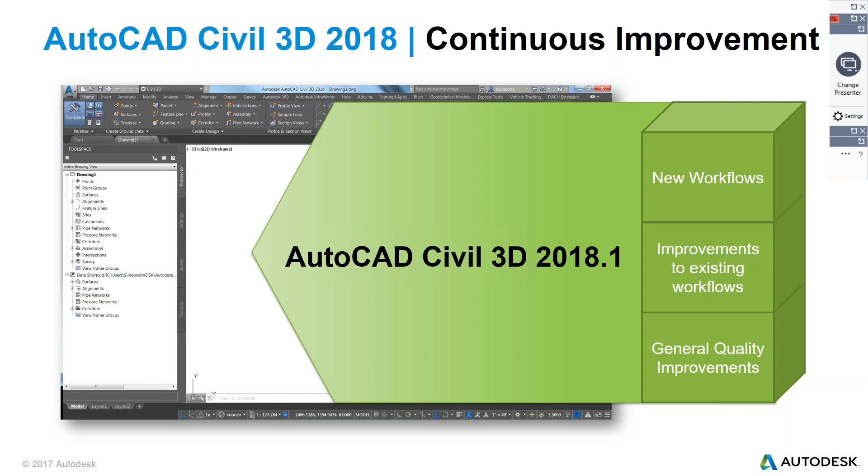In some cases they're adding new workflows, in other cases modifying existing ones. So the goal is really part of that whole continuous improvement strategy—basically to give you benefits, give you things that make you more efficient, but do it in a way that's as least disruptive as possible.

As we looked at this update, we started the process by looking at the different users and the problems we want to first understand and then provide a solution for. It's basically a simple pattern: I, as a specific type of user, need something. I, as a transportation engineer, need some ability. I, as a drafter, need a solution for. I, as a CAD manager—those are our primary personas that we're targeting solutions for. They all fit into, in this case, a Civil 3D customer. So I, as a Civil 3D customer, need a solution for these types of problems.

One of them is: I need an easy way for my design team to model and optimize roadway rehab proposals. I, as a Civil 3D customer, need a more flexible solution for creating pressure and gravity network content. I need to reduce the time it takes to create and edit section sheets. When we get into the blue, these are more about modifying existing workflows, whereas the green are more about new workflows we've introduced.

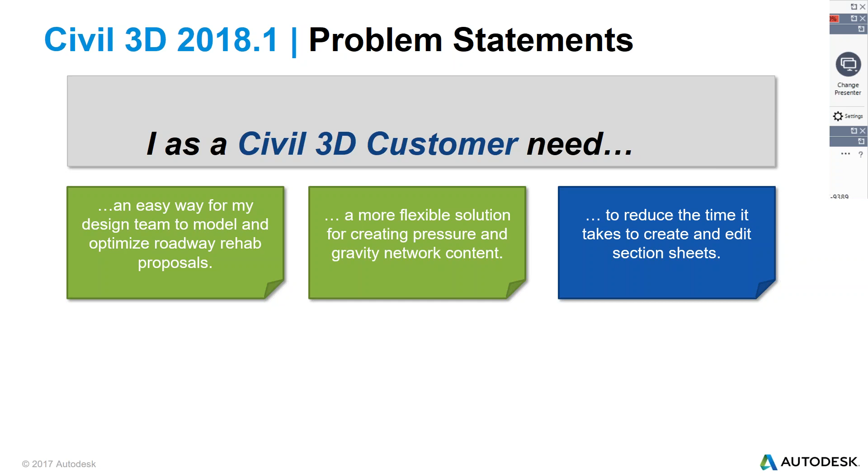Continuing on: I, as a Civil 3D customer or organization or CAD manager, need my CAD manager and production users to maintain design and production standards.

I need a roundabout modeling solution that meets design requirements and delivers a high quality model. I need the ability to share alignment and profile geometry with others.

These are the big theme areas or focus areas of Update 1. There are other smaller things, but we won't get into general maintenance, defects resolved, or similar changes in this presentation. Those will be clearly documented at launch time, so in the README you'll have a list of all those types of changes.

Okay, so let's start to drill into these. Let's just jump right into them.

The first one, I'm going to pass this over to Tim, is probably the primary theme of the release. This is tricky from a marketing standpoint because we typically want to call out one primary focus area, and this really is, I think, the biggest change within the product.

It's something driven by demand from our owner-operator clients, but it also greatly impacts our commercial accounts, our consultants who work on any type of transportation project. So what I want to do is pass it over to Tim to walk through what we've done here.

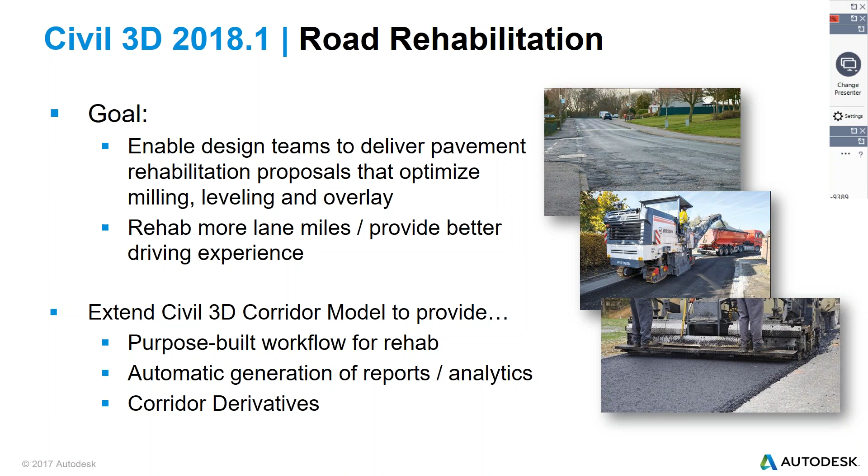We also made sure that any work we did around road rehab got you the same kind of derivatives afterward—anything needed in the way of extracting solids, feature lines, and that sort of thing from the rehab corridor model. So that was the goal there.

This also ties in very nicely not only to what we have in the Civil 3D corridor model today, but also into some of the workflows we've been working on the InfraWorks side.

In 2018.1 for InfraWorks, we did a lot of work making it easier to extract linear strings from point clouds. Based on those strings, we're able to bring them into Civil 3D and create a really good model of the existing ground surface, which gives us great data to leverage in this road rehab process in Civil 3D.

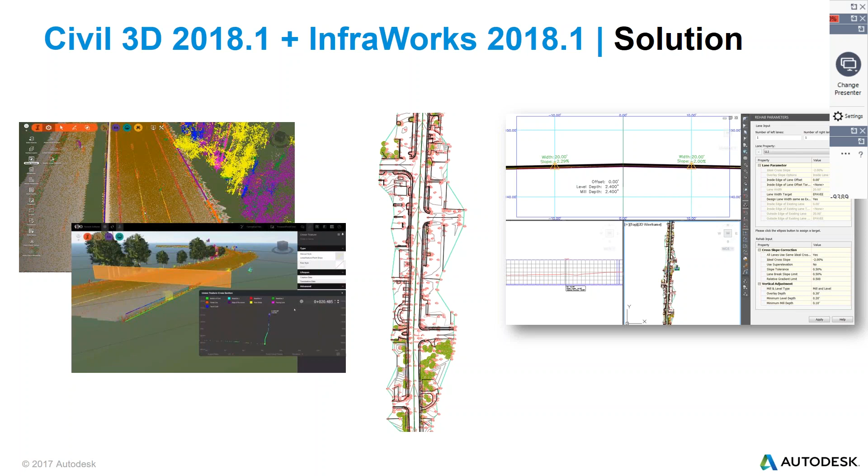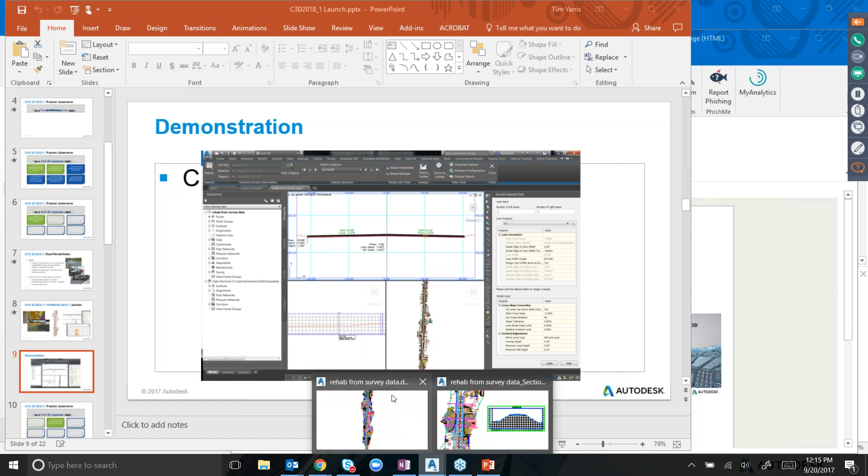So with that, I'm going to jump into Civil 3D and give you a quick overview of how this works.

The model I have on screen right now is an existing site, not created from the point cloud data I was just describing, but an existing ground surface created from a number of survey figures and COGO points grabbed from the real world. So basically what we have here, there's no corridor model, and no assembly or anything like that.

So basically what I'm going to do here is go through a process that's just kind of rehabbing a portion of this particular road. As Dave mentioned, in the .1 update, we did a really nice job integrating some of these new tools into the existing Civil 3D interface.

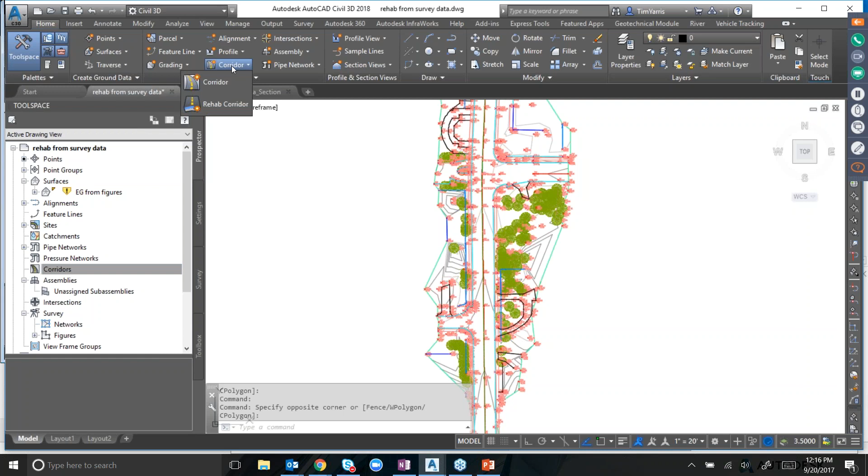In the past, when we did things like productivity packs, we'd have a toolbox with a bunch of nodes for the new tools. But for this case, we were able to add some new tools directly into the existing ribbon. So I'm going to launch this new rehab corridor creation process just from the ribbon, like you would for a regular corridor.

It's a very familiar situation to what you have with a lot of the other Civil 3D objects. We have just a creation dialog where I'm going to name my corridor, rehab corridor. Same kind of thing with styles, alignments, and profiles, all that good stuff. For this case, I don't need to have an assembly defined out of the box.

I just need to know my alignment - I'm using an existing ground profile for this case - my target surface, and then what I'm going to do is restrict this region. I'll start my region around here, and end this particular region around here. After you've done this, you can add corridor regions for different rehab areas as well. I'm just going to target my existing surface.

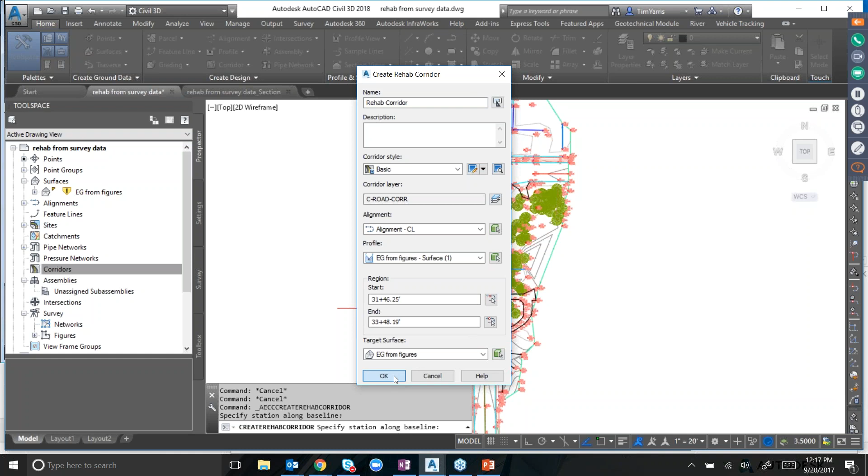Once I click OK, a couple things are going on here. You'll see on screen a similar kind of situation as we have with the existing corridor editor, like the section editor in Civil 3D. We have a newer version of that purpose-built for the road rehab process, and also this newer interface docked on the right-hand side of the screen.

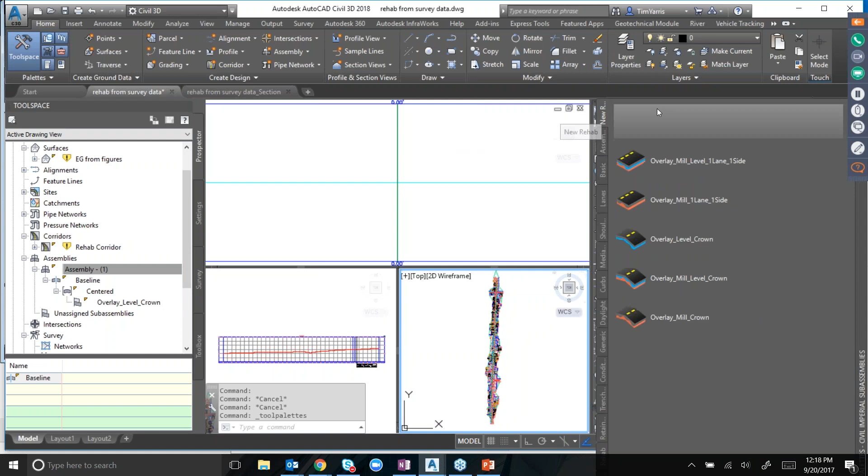This is just letting you enter rehab parameters. As I get into it, it automatically created a corridor model that's, for all intents and purposes, empty right now. We also have an assembly that was created, just a dummy assembly based on these new rehab subassemblies we're shipping with the product. Different subassemblies are applied automatically as needed for different purposes.

So for this case, you'll see I have a left lane and a right lane. I can do things all along this. What I'm going to do is specify what your cross slopes are and all that good stuff - targets, all that sort of thing.

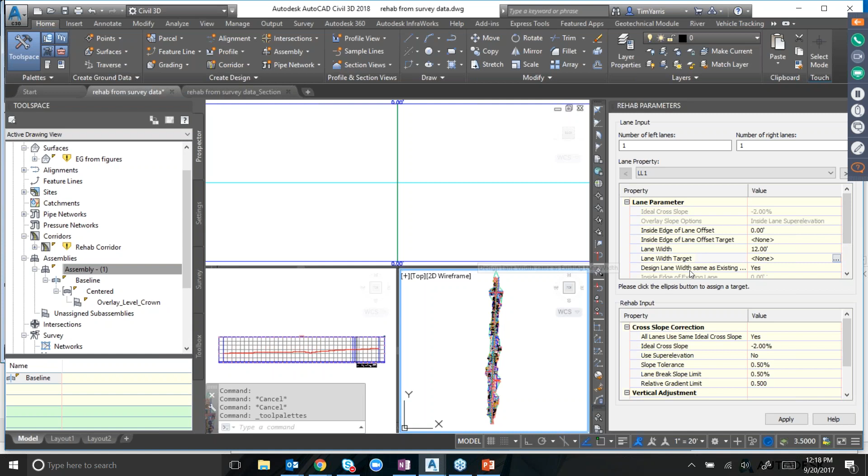Like I said, I have a whole bunch of feature lines, or survey figures rather, that I created in this model. For my left lane, I'm going to set one of those as a target. I'm on my left lane, and I know this is on my right side of the corridor, so I'm going to pick that one.

Yeah, the change is going from the top of the screen to the bottom. Yeah, it looks like he's picking the other side. But yeah, really - trust me, I know what I'm doing.

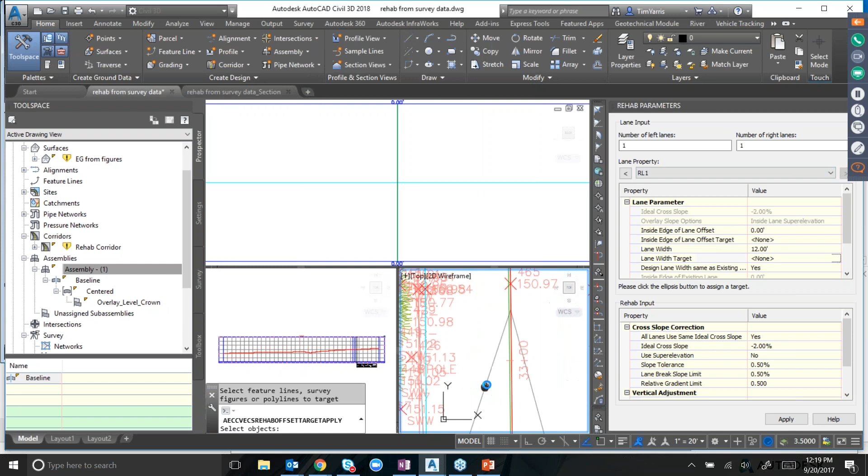I'm going to do the opposite on the opposite side - same kind of thing, so I'll pick that one. I'll zoom out a bit just to get my bearing straight again, and I'll click OK.

And then same kind of deal down, like anything I do at this particular dialog, this is going to affect both lanes for the entire corridor. So what I'm going to do next here, this bottom portion kind of lets you specify more of what actually is going to happen as you're rehabbing the corridor.

You can set things like your ideal cross slope, whether you want to apply super elevation that you have applied to your alignment. You can specify what your process is going to be, whether you want to level it, mill it, or do both. For this demo, I'm just going to go with milling only, and I'm going to set a minimum mill depth of 1/10 of a foot.

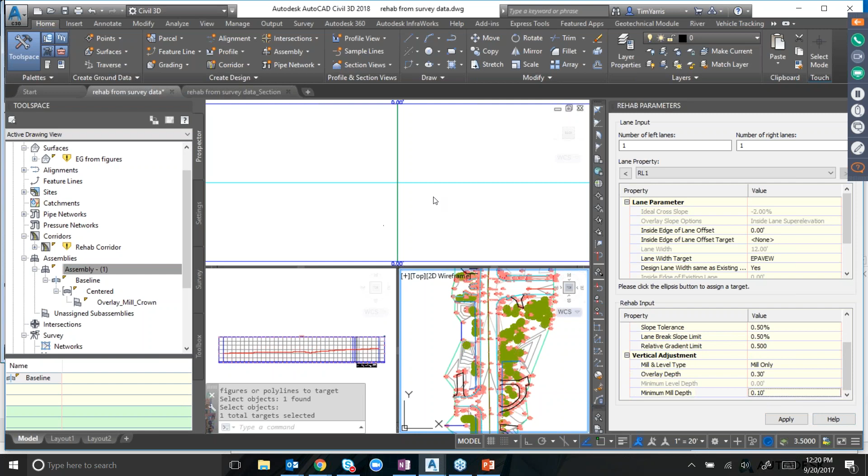So as you see here, there's nothing going on at this cross-section view at the time. But now that I'm going to click apply, it's going to actually build that subassembly, or that assembly, for me, and it's going to apply it throughout this region.

And now it gives me a really nice view into what exactly is happening with my rehab corridor. So if I go in and zoom in, you'll see a couple things going on here. I've got a style set up here showing... keep losing my mouse here for some reason. But anyway, what's happening is that I've got this—

hatched version. Okay, so the pink layer here is showing the milling depth and all that kind of thing, and then the hatch is showing what my overlay is. Oh, leveling. Leveling. Thank you, Dave.

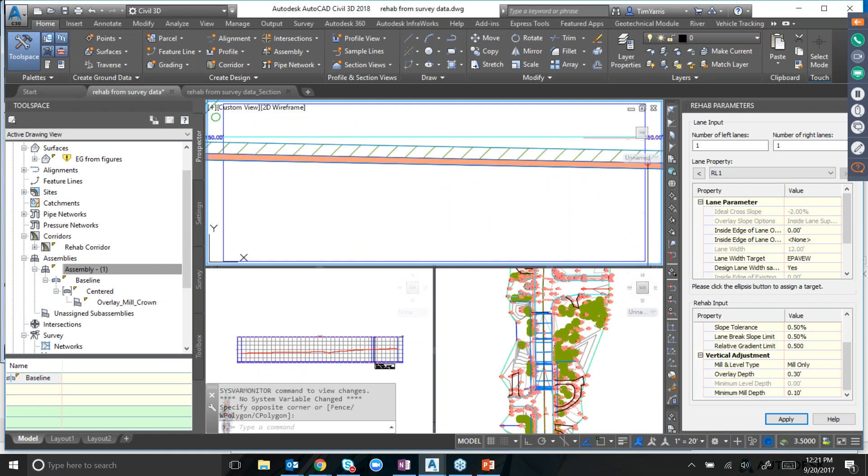Yep, there you go. So basically what's going on here is that it's building out this corridor, specifying a whole bunch of really critical points, and we have those critical points labeled as to what's specifically going on at each of these points. So I've got my mill depth labeled really clearly here. Sorry about those big funky markers, those weren't what I was expecting here.

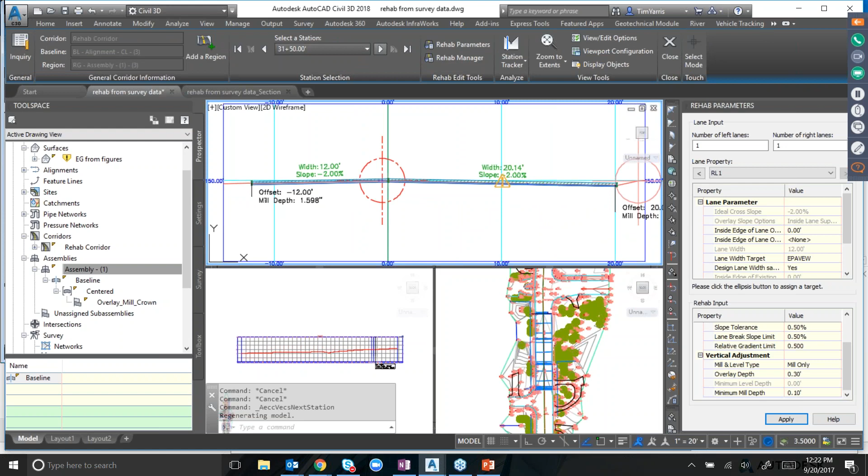But anyway, so basically what's going on is that I've got this corridor rehab ribbon here that now I can go ahead and step through section by section what exactly happened with my rehab corridor.

And as you'll see here, both in my plan view and also my profile view, we have the tracking markers set up there, so that as you're stepping through all the different stations, you're seeing in all contexts what's going on, and you're seeing in the profile what my adjusted elevations are for my cross slope correction and all that kind of thing.

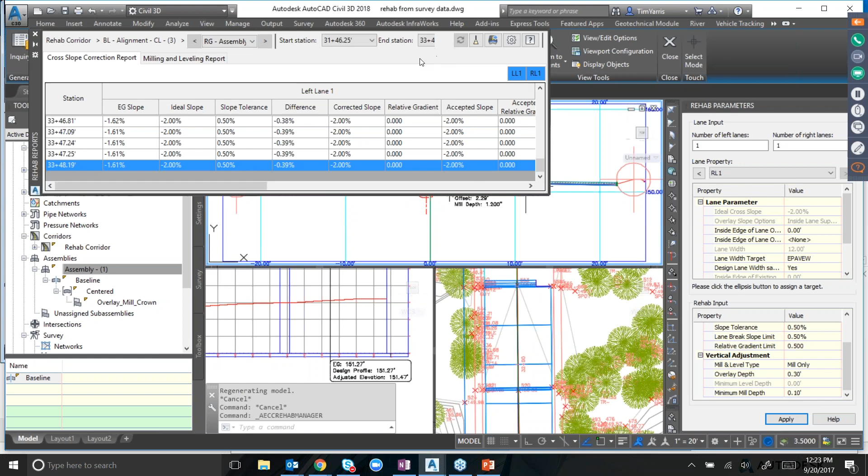So basically, once I've got all that great information going on here, you'll see that I have some warning glyphs showing when some of those parameters that I set in the right-hand panel have been violated. I've got some tooltips showing me exactly what's going on, and I can actually go into this Rehab Manager tool. This is this new tool that we have here, and it's going to give me a lot of information about what is specifically going on at each of these stations.

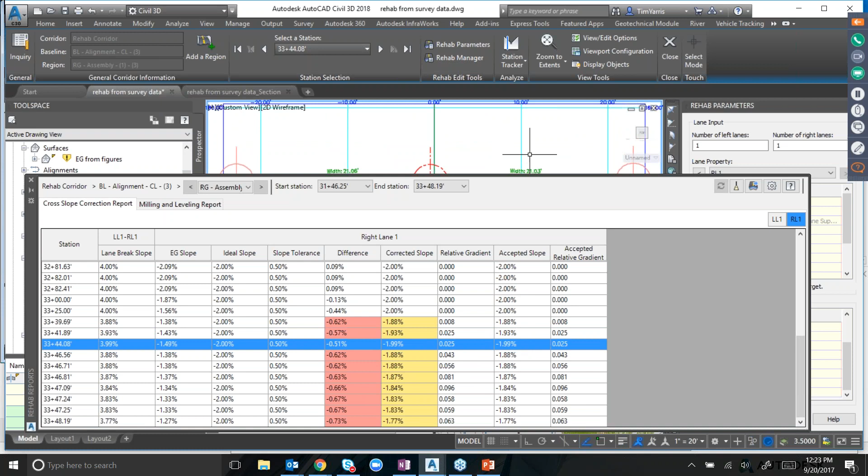And so I know for a fact that I don't have anything that's necessarily violating anything on the left lane, so I'm going to hide my left lane parameters in here. And so basically what I could do in here is make any kind of minor modifications to my rehab corridor at each individual station.

So for example, right now I have my slope at negative 1.99, if I wanted to bump that, if I want to just round that off really nicely to a solid 2, I can do that. And as you'll see here, that automatically changes in my section view as well. So I can just keep doing that and make any kind of really minor tweaks as I go along and as I want to modify my design.

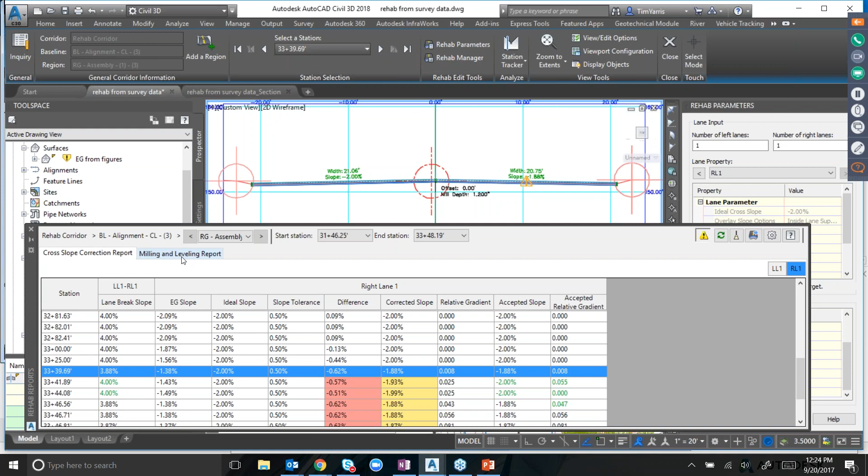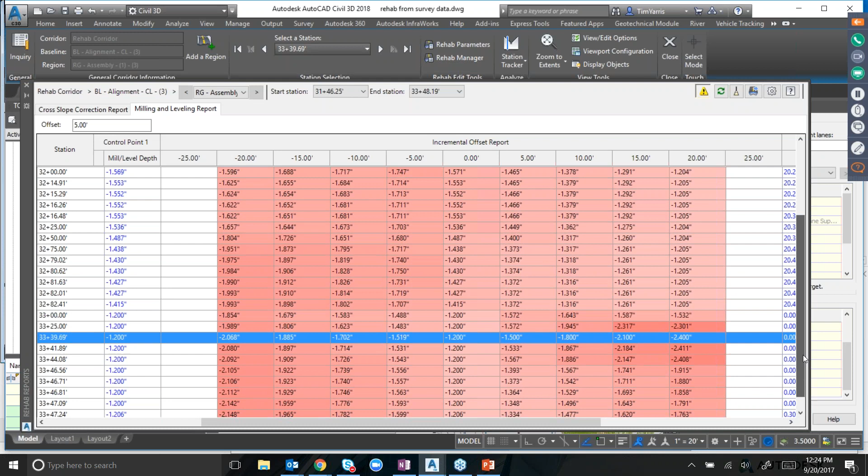As users get further into the process, we have this milling and leveling report tool on the rehab parameters panel. That gives you a great overview of what's going on across the entire rehab corridor region you're working with. We have a heat map showing specific areas where the really critical milling or fill and leveling areas are taking place, giving you a great overview. Then you have tools up here to export the report to a CSV and take it over to your pavement manager for further analysis in Excel or something like that.

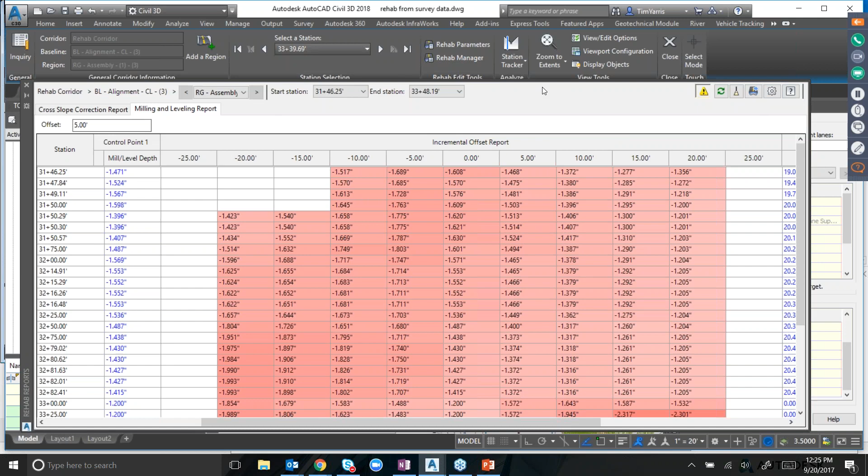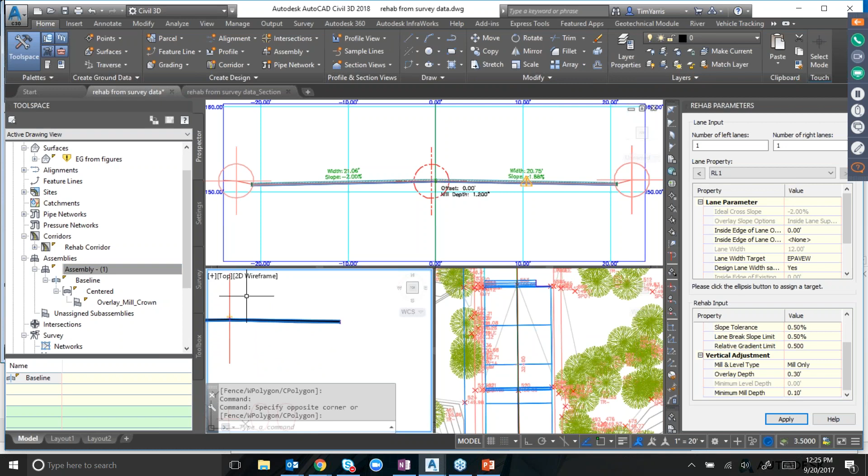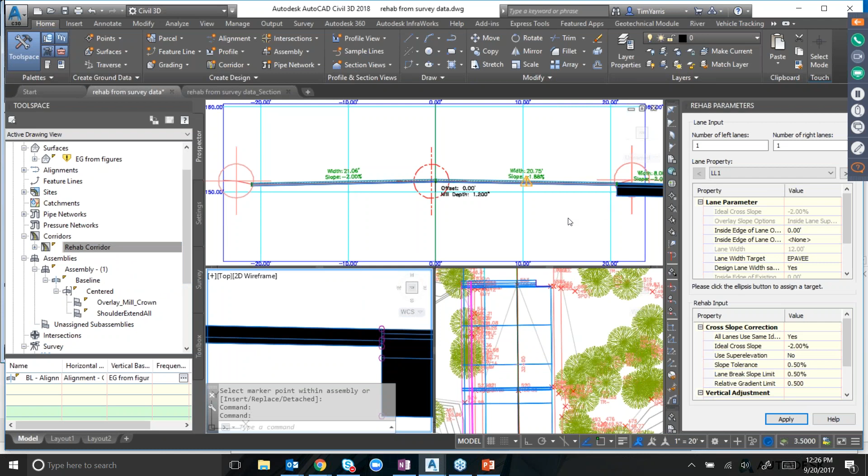Going back to the whole idea that this is just a corridor model, as Dave and I said before. So if you were doing something like a widening, where this assembly's been built for you automatically, what if you want to add a shoulder subassembly onto this assembly that's been built for you? I can do that, rebuild my corridor, and that's automatically tacked onto the rehab corridor that's been built for me.

And again, I can go get the same information out of the rehab corridor model that I can get out of my existing Civil 3D corridor. I can extract my solids from it, drive along it, and do any downstream processes that I can do with any of the other corridors I have today.

There's a ton more we could get into with this, but I'm going to keep trucking through some of the other stuff in the interest of time.

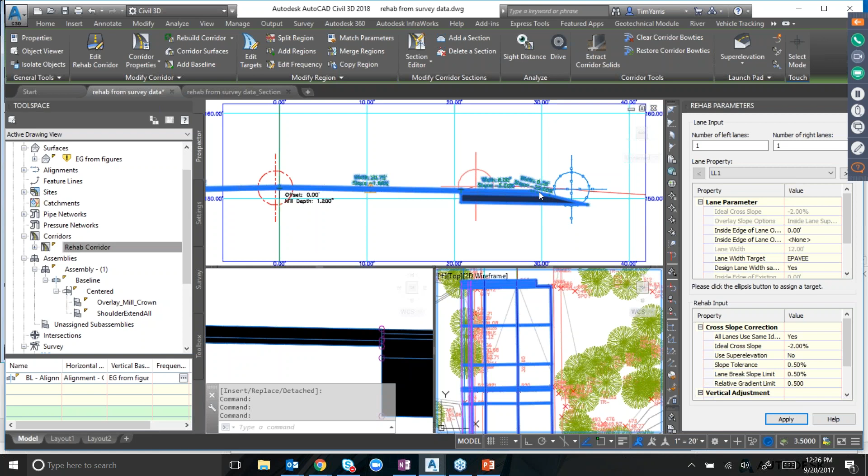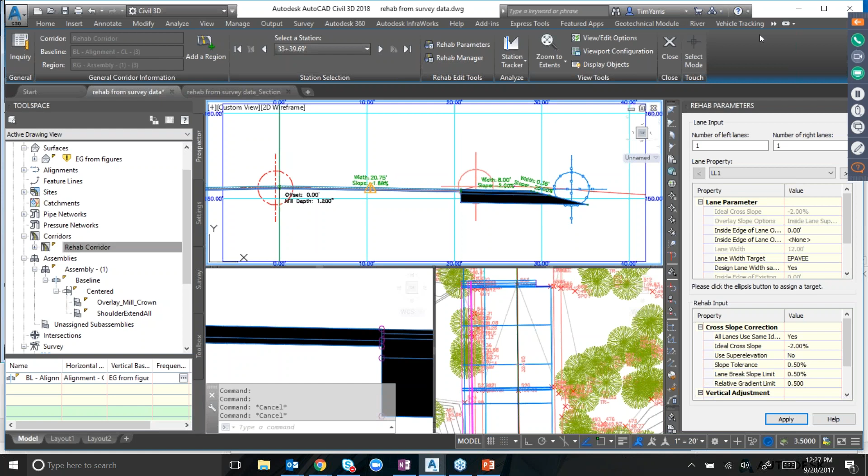I think the key point to get across to everybody is, one, this is just a Civil 3D corridor. It's a corridor that knows it's got a specific type, a rehab corridor, but it's still a corridor. So as Tim showed, you can modify that corridor using traditional corridor editing or interaction. Also, all of your corridor output and derivative utilities or options are available, so you can extract strings, build surfaces, make solids, or do any of those other things, including production drafting. That's a key thing because it greatly expands the value of this.

The other thing that's been really interesting for us is this idea of taking the corridor as a starting point and building a purpose-built workflow around it. We see that as something that could be beneficial in other areas. We're investigating whether there are other very particular types of corridors that would be much easier for people to compose or interact with if we built some type of interface like this. I wouldn't be surprised if over time you start to see more of this approach of extending the corridor into something more targeted.

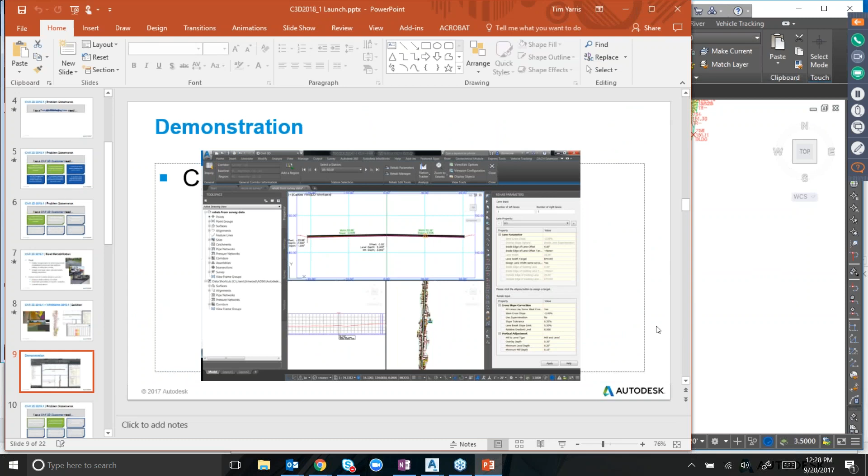Yeah, definitely, thanks Dave. We're really happy with it because it keeps you from having to know what you need before you really start the process. So just having the software build the assembly for you is pretty awesome. I think that's what I wanted to touch on as far as the rehab was concerned. Correct, Dave? That's all we're going to cover.

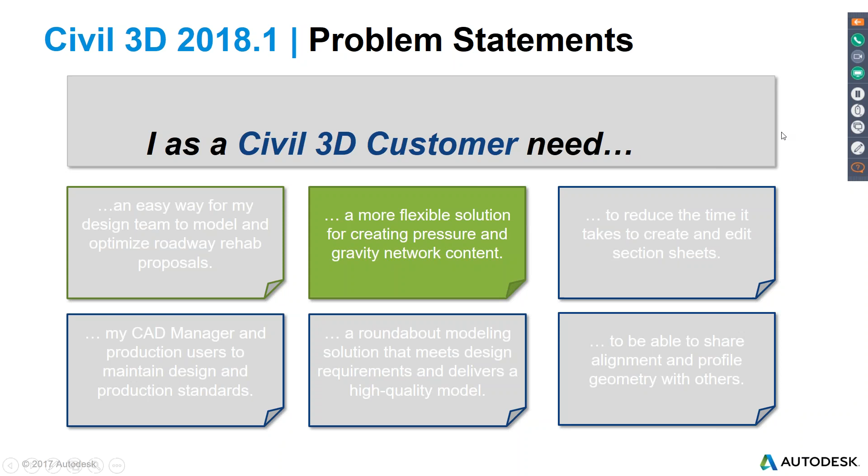We want to show that slide first. Oh, I'm sorry, yeah, good point. So Tim, should I jump back over to you? Yeah, me please, just for a second. Okay, sorry, our bad.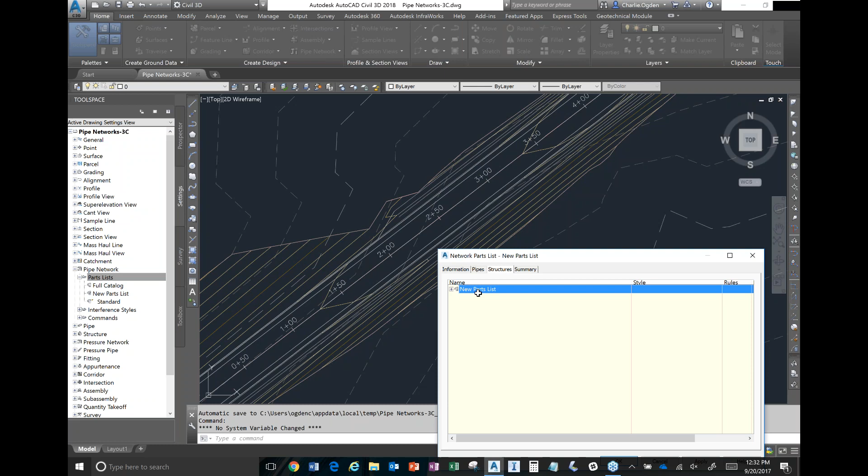So in some cases, if you want a new type of structure, like a curb inlet or a combination inlet, you'll notice if I go and add a part family inside Civil 3D here, I have a number of access manholes, a number of inlets.

But if I scroll through these, they're all grate inlets. So one scenario is maybe you want, these all have specific sizes, and you may want different sizes of these grate inlets or manholes.

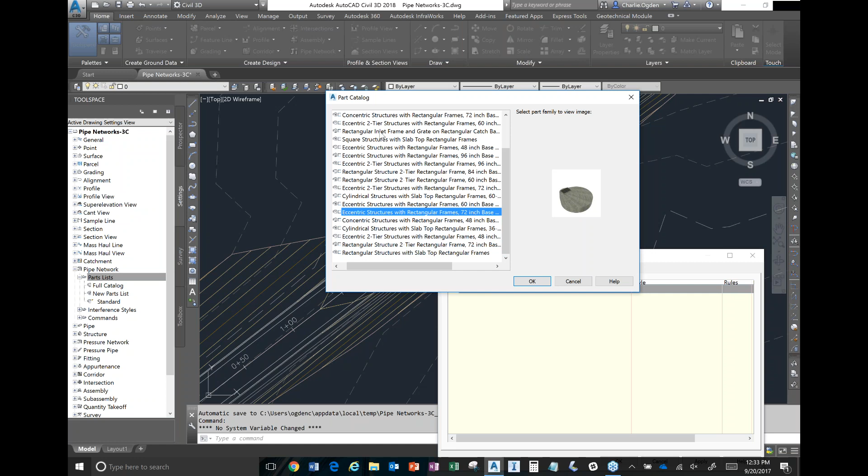You may want a different type of inlet altogether, like a combination inlet.

So what we would do in this case, either case, is use this new infrastructure parts editor. You'll find this on the home menu under design and the dropdown below all the other tools.

So infrastructure parts editor, this would be able to build parts, so replace the part builder tool, replace the content catalog editor that was used for pressure pipe parts. But I'll go ahead and launch this.

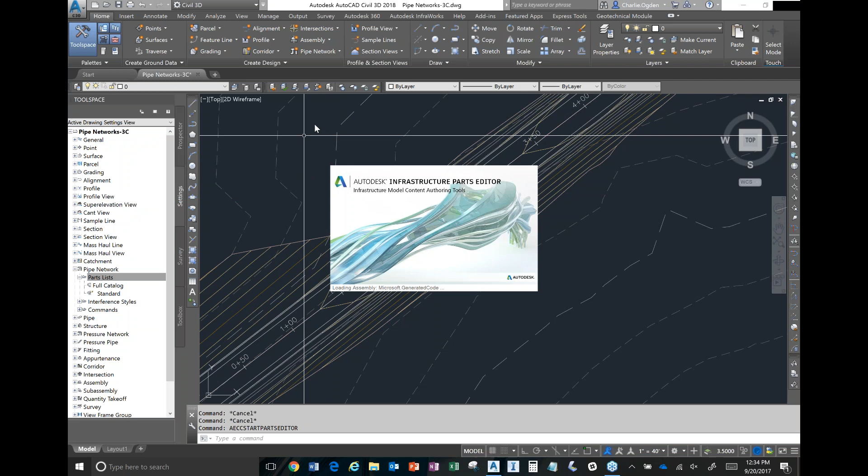And if you've used Project Kameleon in the past, this will be very familiar. It's the part editing tool that was part of Kameleon, the same tool. There's an update on publishing that I'll show.

You can come in here and open a part library. What you're seeing here ships with the tool, but you can use this to generate drainage structure content. Piping is the pressure piping content. In the past, this had bridge tools, but like I mentioned, the bridge tools have been worked into InfraWorks directly.

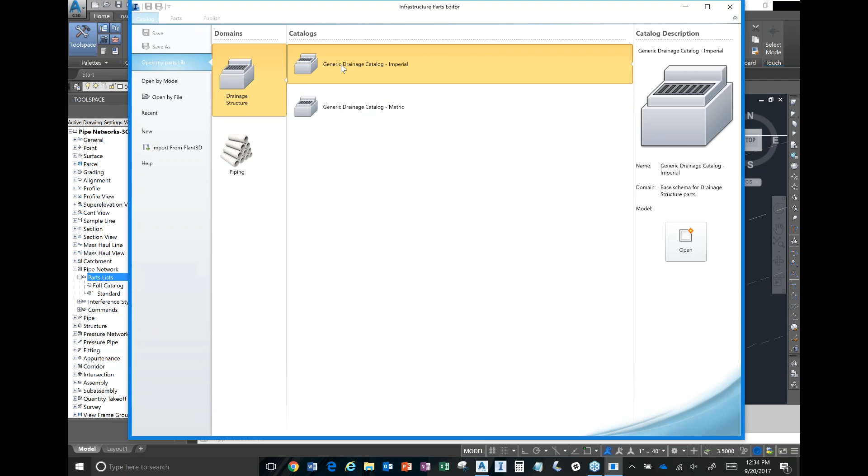So I'm going to go in and edit one of my drainage catalogs here, and you might see this if you've done any editing. I'm just going to say yes, so it's going to overwrite the drafts that I may have edited in the past.

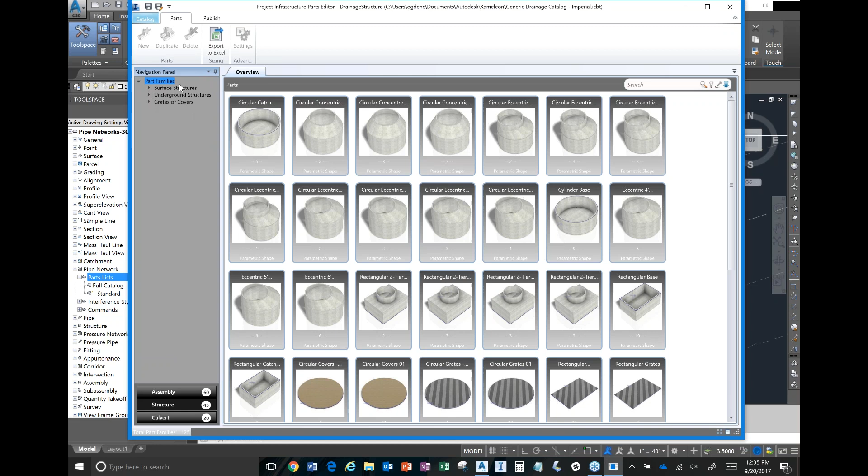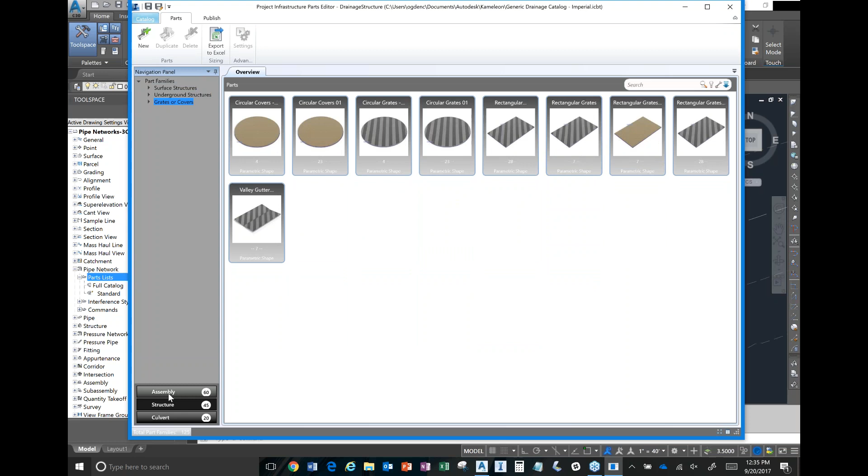Inside the tool, drainage structures are made up of our surface structures, which is the top piece that meets the ground, either where a grate or a cover sits, or a curb opening. Then there's an underground structure that's the barrel, grates and covers. These three pieces get put together in an assembly.

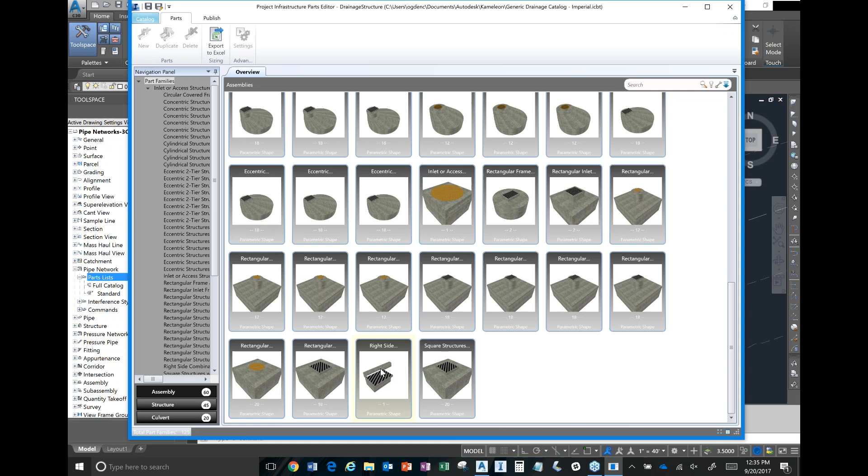So we end up assembling from different pieces to build manholes and inlets. You'll see there's a number of manholes and grate inlets here already, and down here there's a combination inlet that's already created. So what I'm going to do is bring that into Civil 3D.

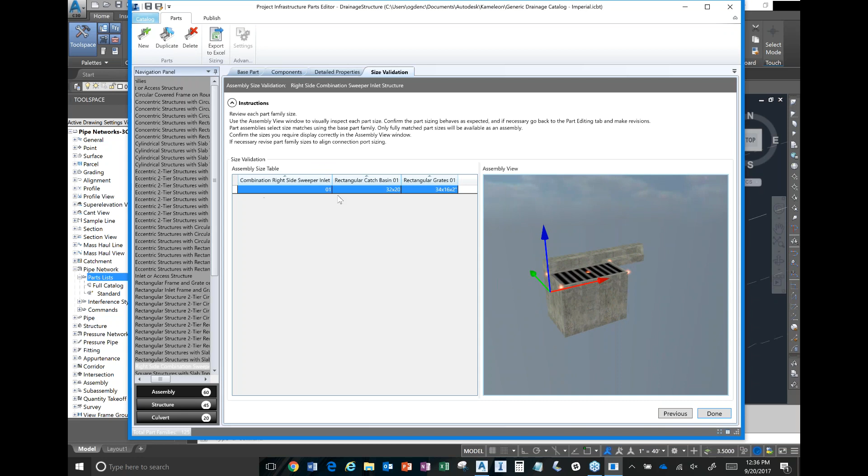If I open this up, you'll see it's made from this surface structure that has a grate as well as a curb opening. It's made up of an underground box structure and a grate for the top. There's some properties like the name, it is an inlet, it has a sump, that sort of stuff you can set here. Under size validation, you'll see there's actually only one size in this, and you can see what it looks like in a 3D model here.

So one quick thing just to show a bit of the workflow, if I go back to structure, I can see the surface structure component, combination right sweeper. I just look at the model of that. That's just the surface piece.

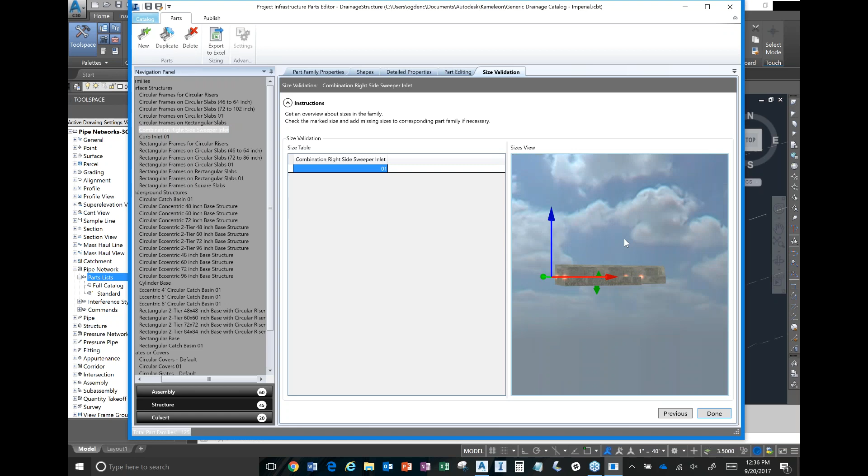The assembly only has one size because there's only one size available for this. But one common workflow that you do in this tool would be to come in and add some new sizes.

We could do that on the part editing tool. If I add a row, I'll get a new row where I can put in a new set of sizes. I'm also just going to rename this. I'm just going to call it a combination inlet. I should probably rename the whole part, but let's say 34 by 16.

I have a new row of dimensions that can be entered. Just to show a very quick example, I'm going to start off by just duplicating what I have for the part that already exists. So just to start with, putting in the same sizes, and I'm going to go back and change a couple.

So 2, 36. Okay, so there's a sketch too that goes along that shows you what the dimensions represent on the part. But there's a couple in here in particular that represent the curb opening part of the inlet.

One is the inlet opening width, and I'm going to change this in mine to 32, so it's about the same size as the grate. Then scrolling over, the total length of this part is the SS length, and I'm going to change that on my new one to be 36. You could change other dimensions too if you wanted.

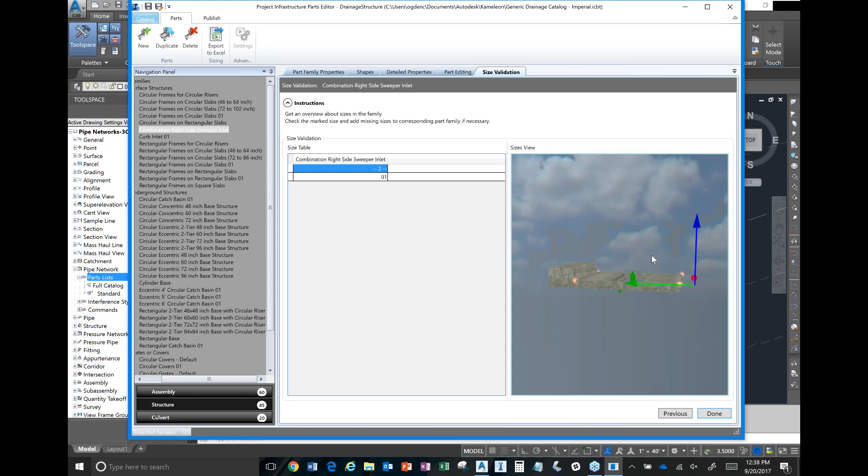But now that I have two sizes, I can go to size validation and see that I did something wrong. Let me go back, I think I changed the wrong one.

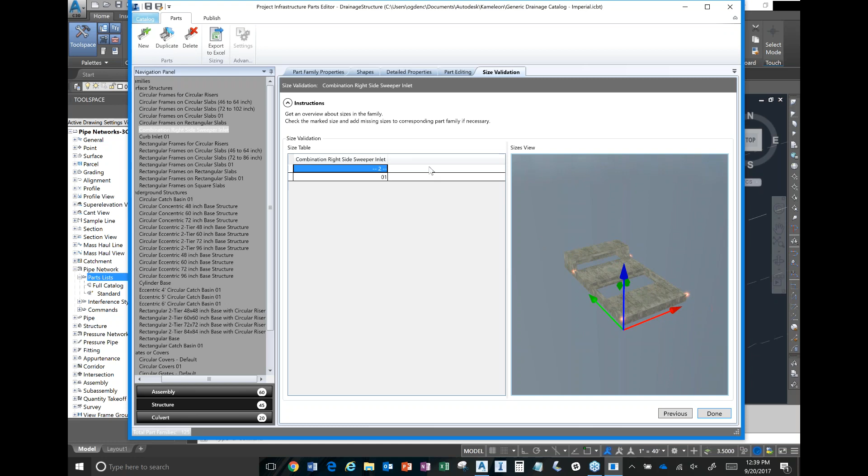Do you have one just pre-canned? Yeah, I'll just bring in the other one. Yeah, bring in the other one. Great, somehow or another, it was my fault. It's always Dave's fault. All right, I'll just get rid of that size.

So you can edit those sizes, and mine didn't validate well. I could see it didn't look good, but I do have this part. It's not in my catalog in Civil 3D, so I'm going to say done here.

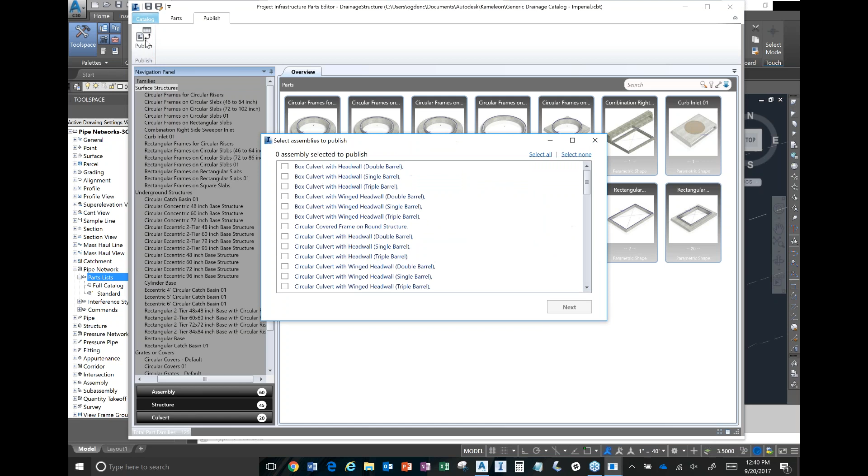So you make any sizes you want to these parts, and when you're done, you can go to the Publish tab. This part's a little bit different if you've used Kameleon, so we've changed the command here a little bit. You have the option of selecting all the parts or just a single part. I'm just going to pick the new one I was working on, combination sweeper, and say next.

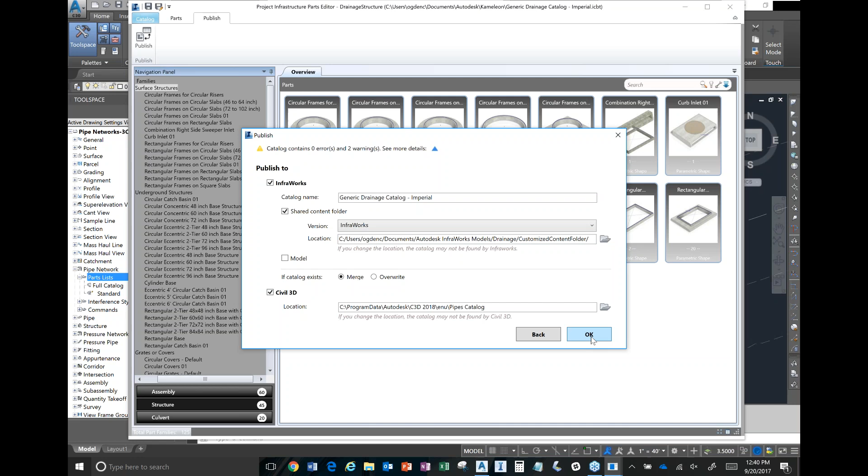One of the changes we did is you could publish at the same time to both InfraWorks and Civil 3D. If you select Civil 3D, it finds where your parts go through the Civil 3D settings, and it's going to put my catalog directly there, so I don't have to do what we had to do in Project Kameleon, which was move files around. So I just select that option, say OK, and it's going to publish those parts to my catalog, and I'm going to go back to Civil 3D.

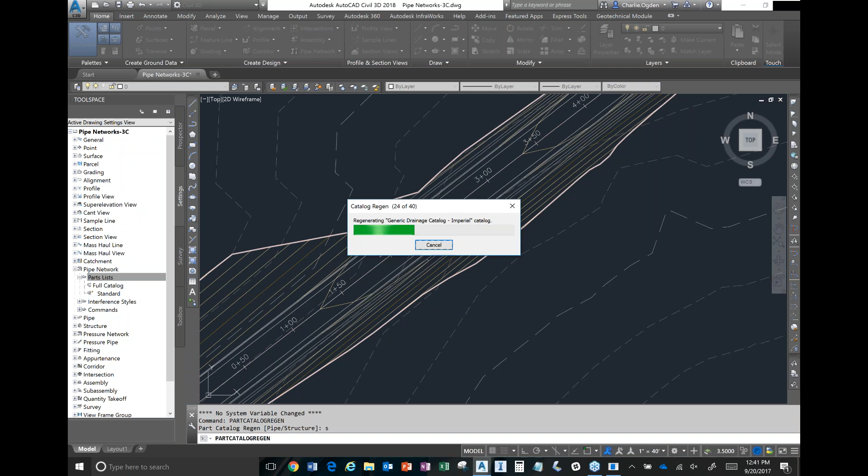So one thing you do need to do in Civil 3D if you've added parts to a catalog is use the part catalog regen command. I've added structures, so I'm going to type in S for structure, and it's just going to regenerate the catalog for me.

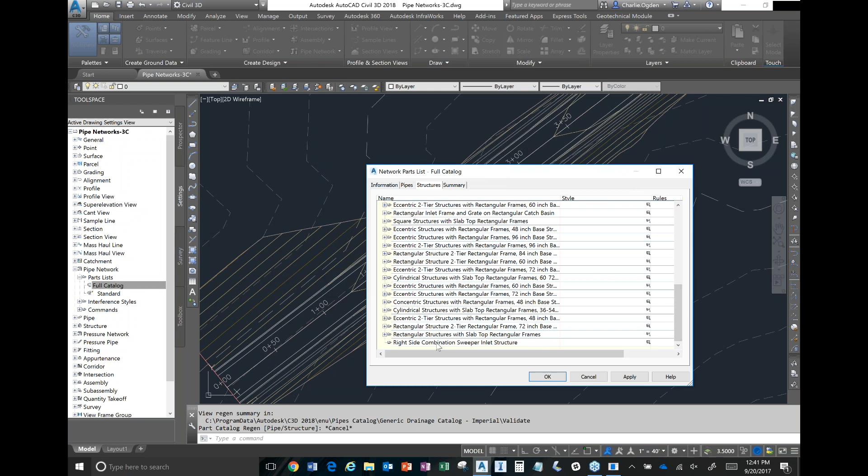And now if I go to the parts list I have, I'm going to add structure. I could see the new part that I created is in here, and I'll say OK, and find it at the bottom of the list and add a size. It only has one size, so I'll just say OK and OK.

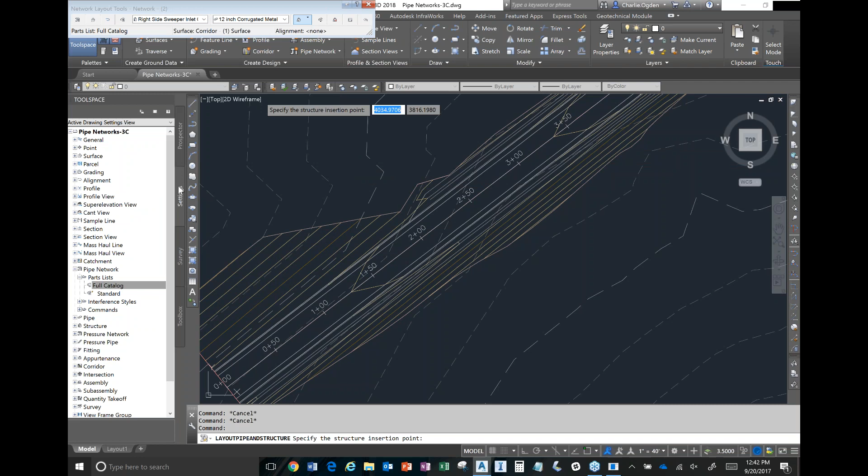Then just to show it, I'm going to create a new network using my catalog and surface, and then just make sure I pick the new right side sweeper inlet, and I'll just create a network of pipes and structures, and just gonna create a couple in here just to see it.

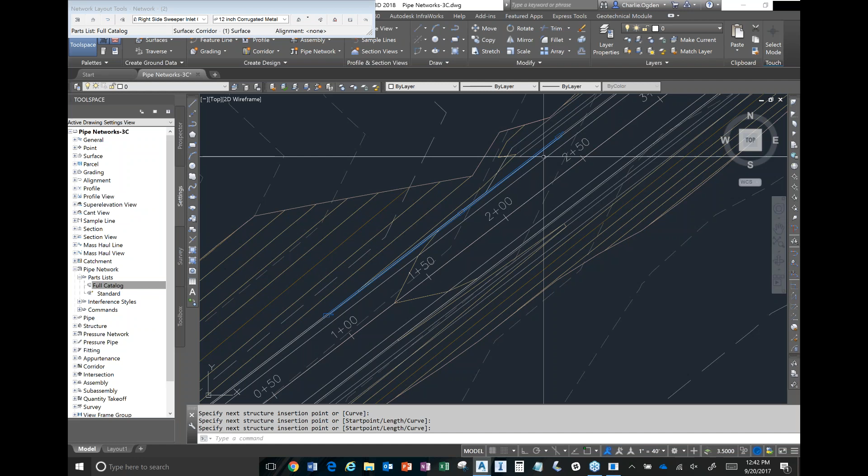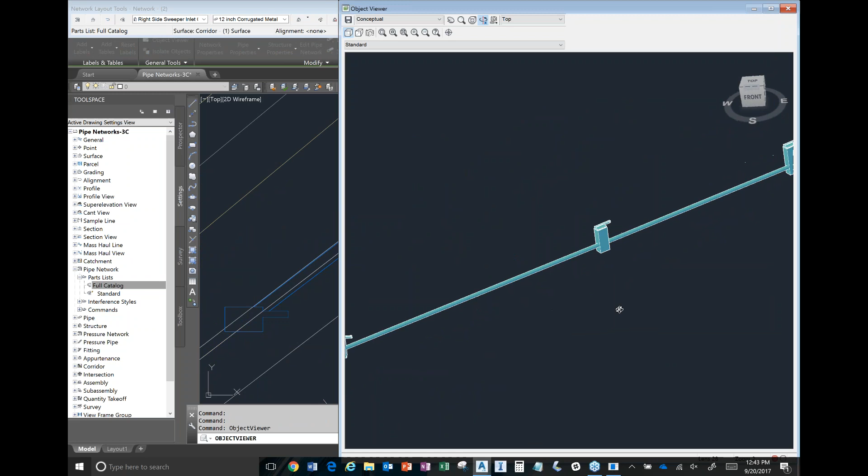All right, so you could see they have a different shape to them, though you could change that with your style. I'm just gonna pick each of these. I should have rotated the first one, but just look at it in the object viewer, and you can see now I have curb opening, combination inlets in the model.

These can be added to your profile. They're just structured now in Civil 3D, and you can do whatever you do with your other parts.

And Charlie, just so as an FYI to people, one of the other things, it's not in this release, but one of the other things we're looking at is support for insertion versus different connection points. So as you get into some of these non-symmetrical structures, giving people more control over how pipes connect into those structures. That's something we're actively investigating. We envision that becomes a bigger issue as people are making more of this type of content.

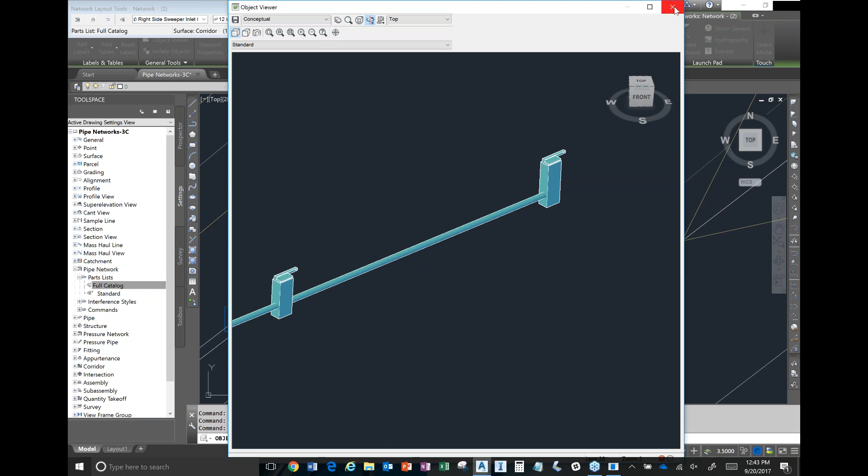Yep. Good. Nice job, Charlie. Thank you. All right, that's it. Okay, let's go back over to Tim. And there's a number of questions.

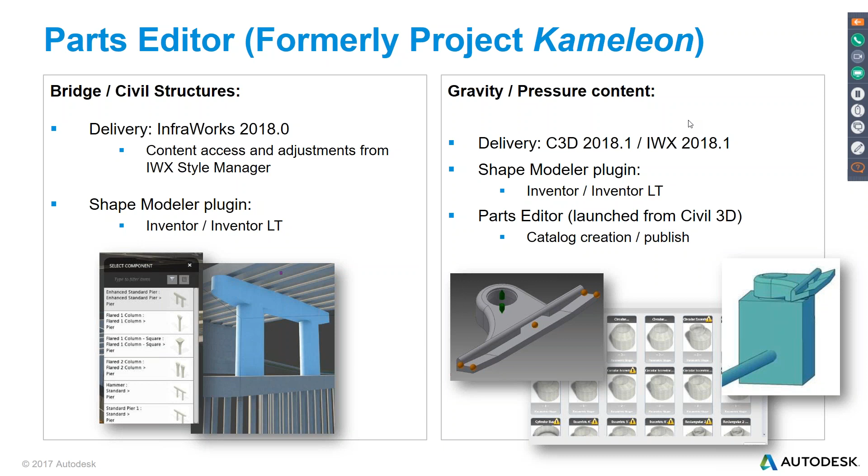All right, looks like you can see my screen again. All right, moving right along.

Okay, so we'll move quickly through these additional ones. One of the other things we wanted to target was allowing you to be more efficient when creating and editing section views. So it's not so much the creation of the initial section view, but really building all the final elements, in particular crossings and projections onto that. So Tim, why don't you take from there?

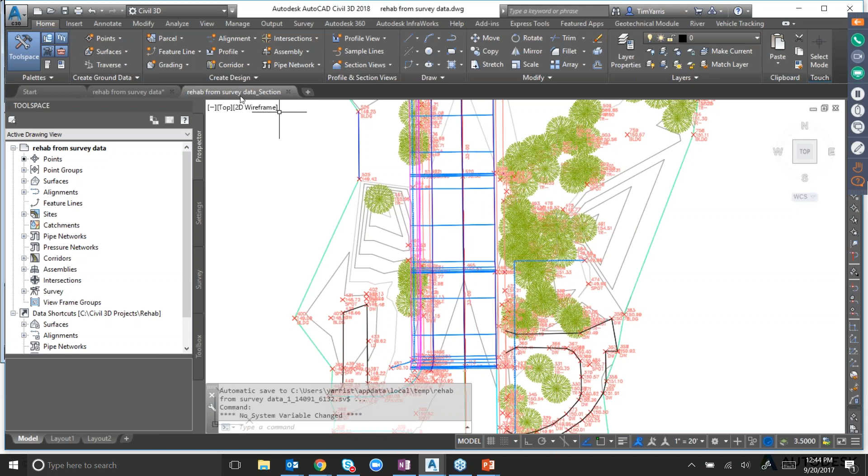Sure thing. All right, so working with another version of the similar data set that I was just working on a minute ago, I've got a couple sections cut in here with sample lines. Just say, for example, I mentioned I built this surface and based my rehab corridor around a series of survey figures. So basically what I want to do now is show those survey figures in some of my section views.

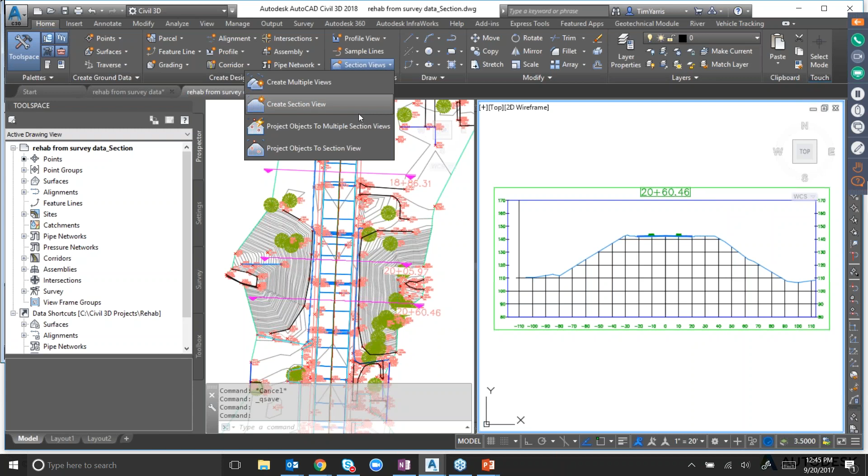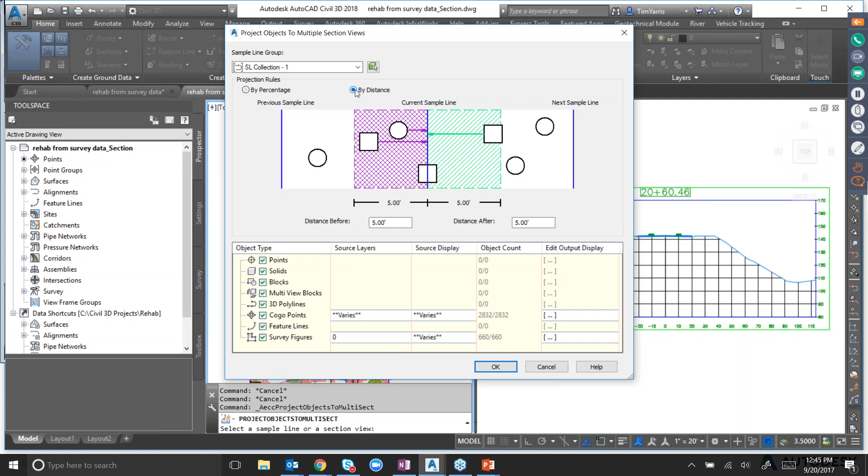So with this update, we updated our section view projection tools so that, let's see here, if I just execute that, and now I'm going to pick that sample line. So this whole dialog box here looks familiar, I would imagine, to people that have used it before. It's basically the idea that you can specify how you want things to be projected onto section views.

So what we did for this new release though is we did a couple things. We added some controls on this main dialog box to let you filter what sort of objects you want to project. In this case, I really only have Cogo points and survey figures in this drawing that I want to project onto these views.

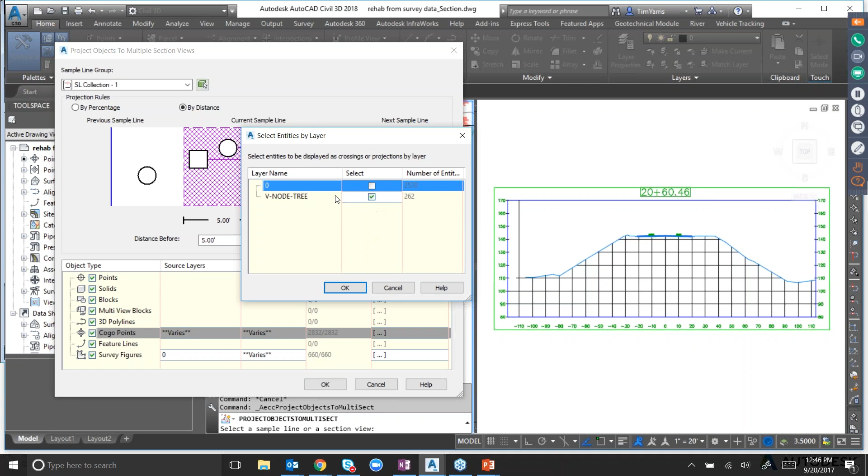So basically, what I can do here is filter what I want to project onto the views. In this case, I don't want all the Cogo points, I just want to concentrate on the ones specified as trees here, so I'm just going to do that. I could also say if I had them classified really well in point groups, I could specify which point groups I want. I'm just going to cancel that though.

We also have this new output display interface, which will show you all the different objects that met those criteria and let you specify how you want those displayed in the section view. You can display them either as crossings or as projections. For Cogo points, I don't want to show them as crossings, just as projections, so I'll specify a projection style. I'll keep the elevation and the label as they are and accept those. Then for survey figures, this is a pretty big new thing we did for the update.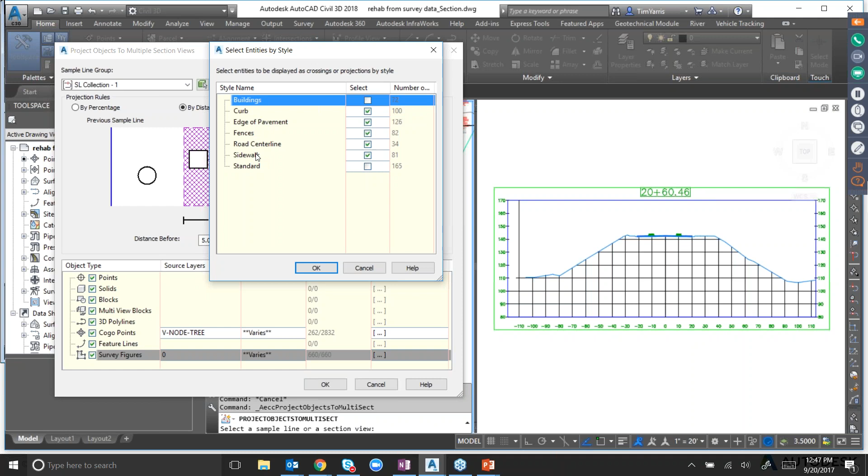I've got a number of different figures in this drawing, so I'm going to toggle off my buildings and miscellaneous items, and just concentrate on these particular types of survey figures. You'll see here we have this object count column that gives you a running tally of how many objects meet that particular criteria. So now I'm down to 423 of 660.

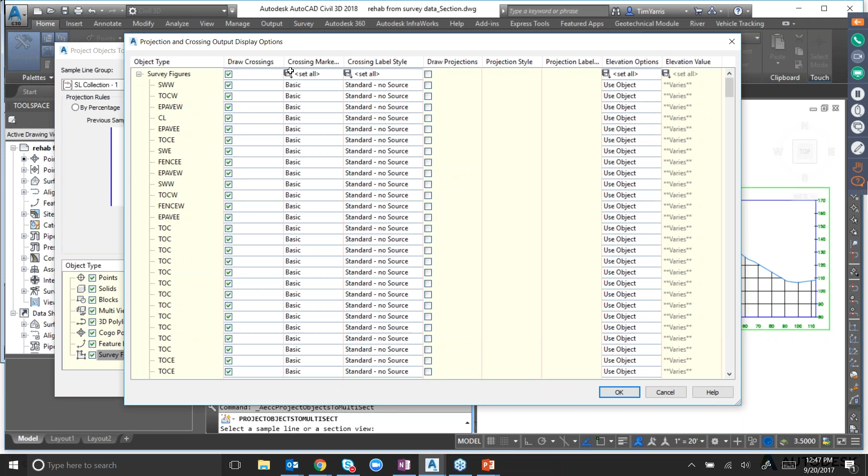Now, just to keep things quick, I want to draw all these survey figures as crossings, using a particular crossing marker style, and I want the label style to keep the elevation as it is. If I click OK, this is now going to blast all of my objects - the tree Cogo points that I projected are showing up in my section views, and I'm also showing all the crossings for these different survey figures used in this drawing.

We also have new label properties available. In the section view node under label styles, we have this new crossing label type for section views, which gives you different parameters to specify for each of your crossing linear features. It's a quick way to identify and label each of those linear crossings and where they fall on your section views.

This is just one thing you couldn't do in Civil 3D before that we're enabling now - it lets you blast them through a number of different section views at the same time. One of the other small things we did that people will probably be happy about: imagine you have tons of different section views in your drawing. One complaint we've heard is about quickly navigating between a section view and where the sample line is in plan.

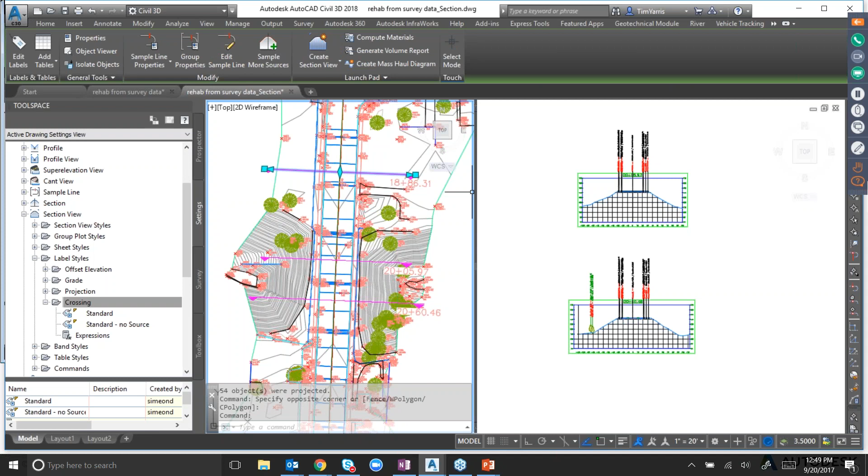Our solution was this new ability - if you pick a sample line, you can right click and say zoom to section view, and it quickly takes you to that particular section view so you can really quickly see exactly what you're working on for that section.

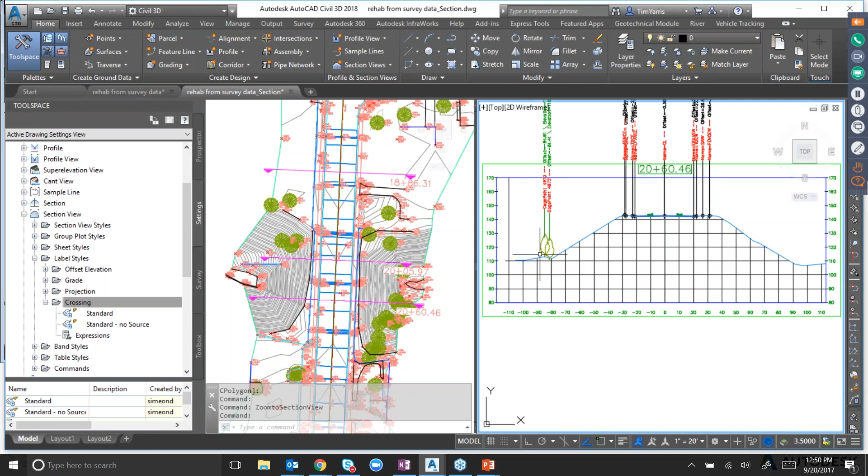Same kind of thing - if you're in section and need to see the context for a particular section view in plan, you can pick that, right click, and say zoom to sample line, and it takes you immediately right there. So you can see the context of different view representations - a really easy way to zoom back and forth between those two complementary objects. Hopefully that'll be a big help for people.

So that's the big stuff I wanted to touch on as far as section sheets. Dave, anything to add on that? No? Awesome. Alright, so I touched on all that stuff in the demo itself.

I'm going to really quickly move on since we're running out of time. So the last thing I'll touch on in my demo is the whole idea that as a Civil 3D customer, I need my CAD manager and production users to maintain design and production standards.

So what this is all about is that in Civil 3D 2017, we rolled out this ability to reference a template in an existing drawing so that you could pull in all of your object styles and label styles into an existing drawing.

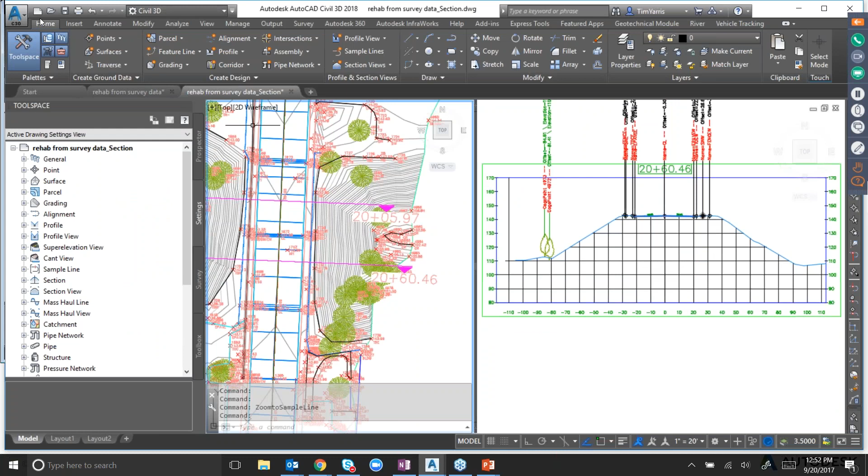I'm going to really quickly touch on that here. I'll demo this by creating a new drawing using ACAD.dwt, so as you'd expect, there's not really anything in here—just very simple, standard styles. So now, under Manage, just like in 2017, I can click this Reference tool on the ribbon.

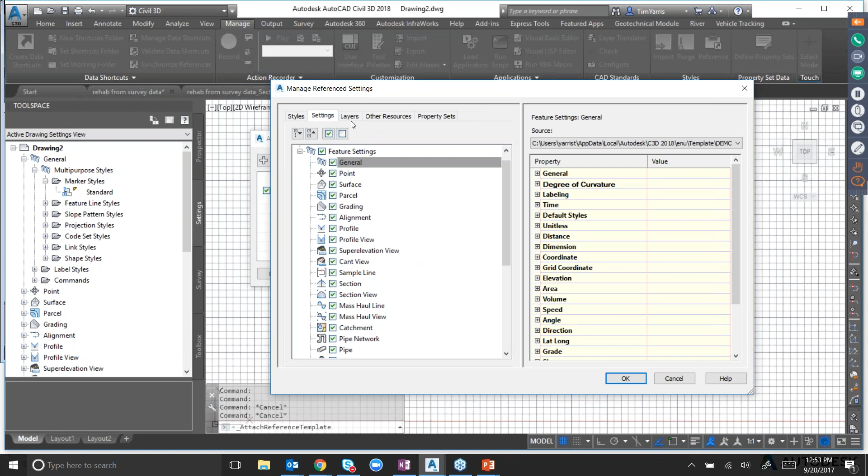But what we added here is, if you add a template, we have this new Manage Referenced Settings button, and this gives you a whole new interface that lets you define which settings, layers, blocks, text styles, line styles, property sets, and all those kinds of things you can specify how you want to bring into a drawing.

You can even get into really granular options, like if you want to bring in some styles but not all styles of a given type, you can just toggle on and off the ones that you want. So it's a really quick and easy way to bring a whole bunch of different resources into a drawing all at the same time, building on the tools we rolled out in the 2017 version based on user feedback.

So good stuff there, and that's the end of my demo, Dave. Yeah, so just thanks, Tim.

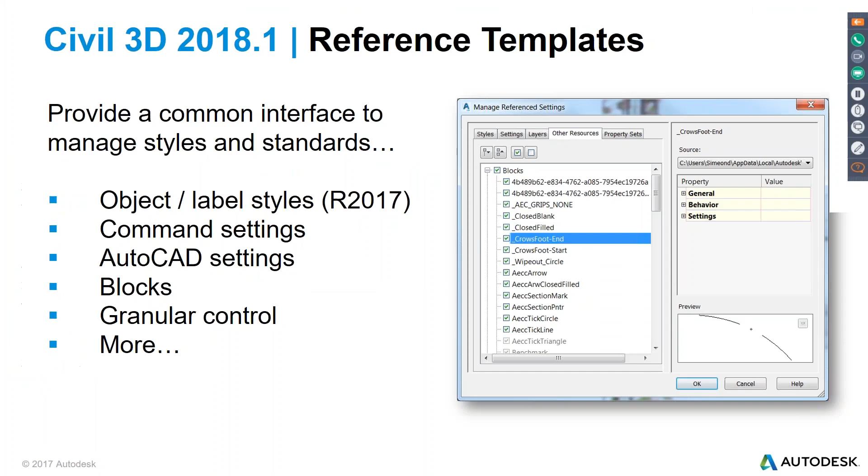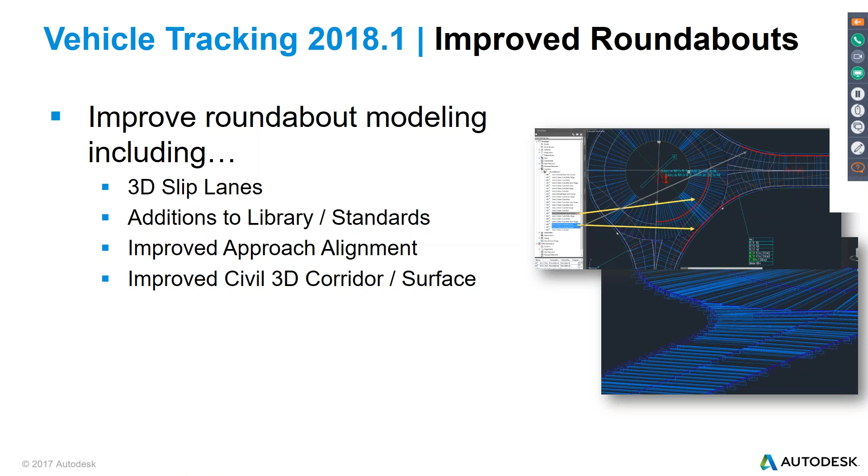It's actually a change in Vehicle Tracking, but the Civil 3D roundabout functionality comes directly from Autodesk Vehicle Tracking. The Vehicle Tracking team has been working on a 2018.1 update, so there'll be a number of improvements: 3D slip lanes added to the library and standards, and the creation of the Civil 3D corridor and surface are greatly improved, much faster and much higher quality.

Okay. Is that still in there? I think I somehow came out of your screen, oh, there we go. Okay, a little late, sorry about that.

Key point is this Vehicle Tracking update, when it releases, will target both people on Vehicle Tracking 2018, any AutoCAD-based installation of Vehicle Tracking, or if you have Civil 3D 2018 or .1. Even if you do not have Vehicle Tracking installed, you can still add this update, and it will update the roundabout capability in Civil 3D.

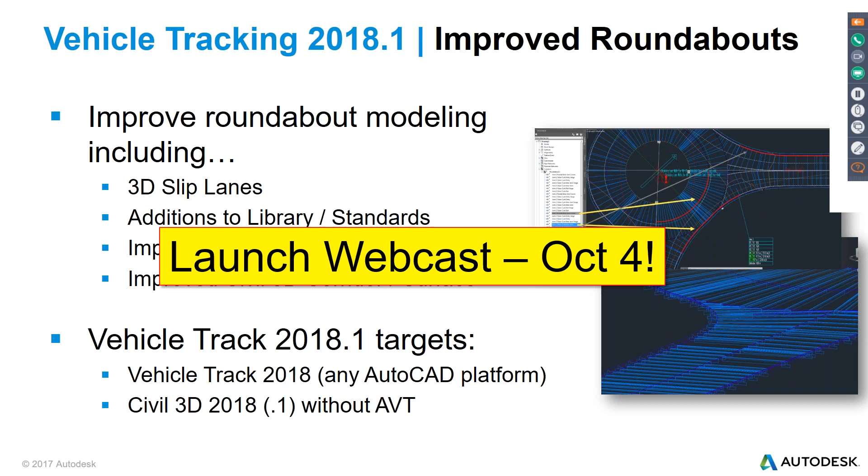We weren't going to go through these in detail because, as Eric said at the beginning, there's a launch webcast for this on October 4th, so hopefully you can all join in on that. There's some really exciting things there.

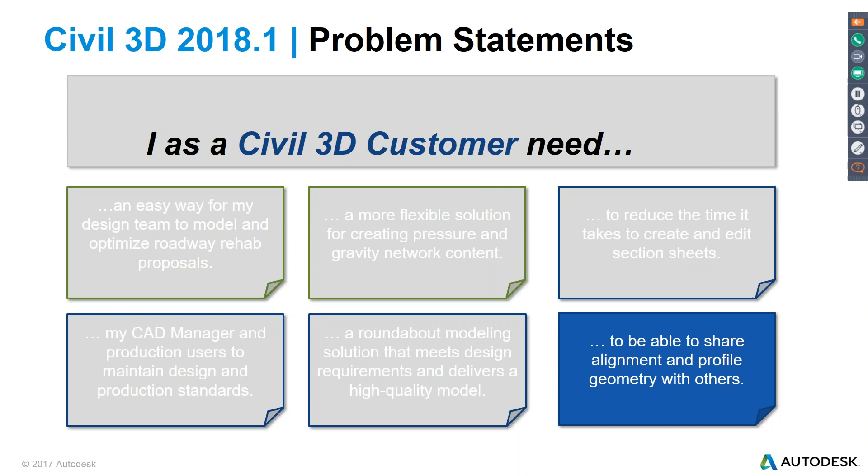Next on the list is this ability to share alignment and profile geometry with others. I think we have a global audience here, so some are going to be more familiar with IFC than others. To date, IFC has been less about infrastructure and more about buildings, but that is starting to change—we're seeing more and more of a focus on civil infrastructure models as part of the IFC definition.

So this is, frankly, a relatively early state on the IFC side. The first thing they've tackled is alignment and profile, so we have been building in support for that.

For those familiar with IFC, we now support the latest IFC schema, IFC 4 and 4X1. This results in changes and better support for all of the objects supported with IFC. We also now include support for alignments and profiles, available through the standard IFC export utility, or if you're importing IFC with an alignment, it will create a Civil 3D alignment. It's a bit of a forward-looking thing showing support for IFC, helping the IFC organization expand its support for infrastructure across product and industry workflows.

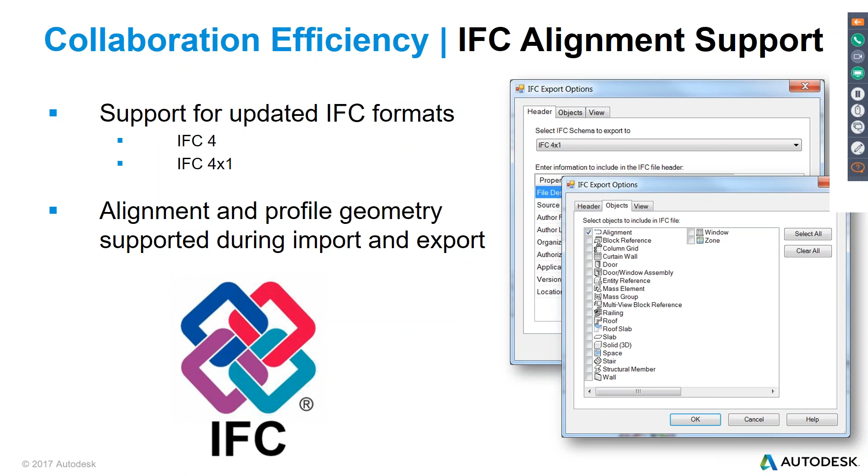Beyond that, there are a number of smaller things: the ability to reconnect all parts in a pipe network, the ability to turn off glyph override for label overrides, and just a laundry list of refinements we call fit and finish. There's also a list of general maintenance updates, bug fixes and improvements that fit into that category.

So again, robust release. The main takeaway is all Civil 3D users will absolutely benefit from the new and improved workflows, as well as all of the general quality changes introduced in Update 1. While we spent quite a bit of time on rehab, we think rehab will benefit most users, but there's also the inclusion of parts editor and the changes to section drafting and template reference templates. Those are things that will benefit all users.

We've spent quite a bit of effort to ensure there's a very painless, low disruption way for people to deploy and update their environment with Update 1. You'll use Autodesk desktop app, or your CAD manager can add this into their deployments and roll it out to everyone in the organization. It just weaves naturally into the Civil 3D UI, with no change to object format, so you get the benefits with minimal disruption.

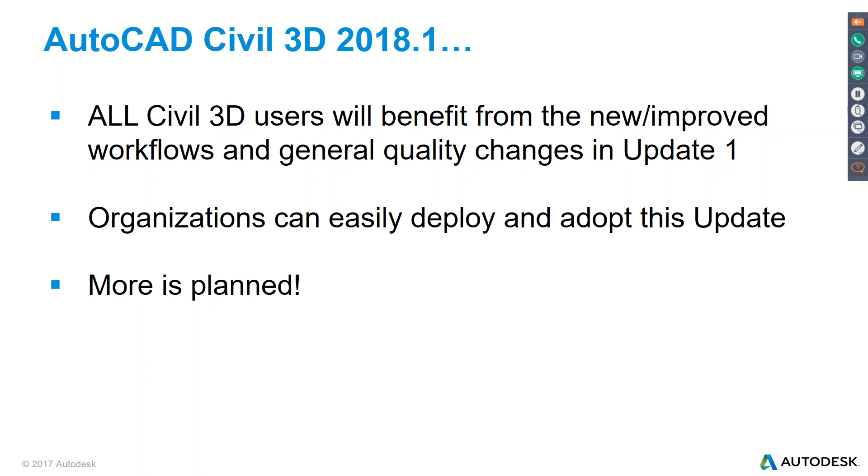This is part of an ongoing theme where we're trying to move toward a continuous improvement strategy, which allows us to deliver functionality when it becomes available in a way that's as least disruptive as possible. We've got other things actively being worked on or researched, so you'll see those roll out as they become available, again with that goal of giving you more with minimal disruption. With that, I think that covers everything we wanted to touch upon.